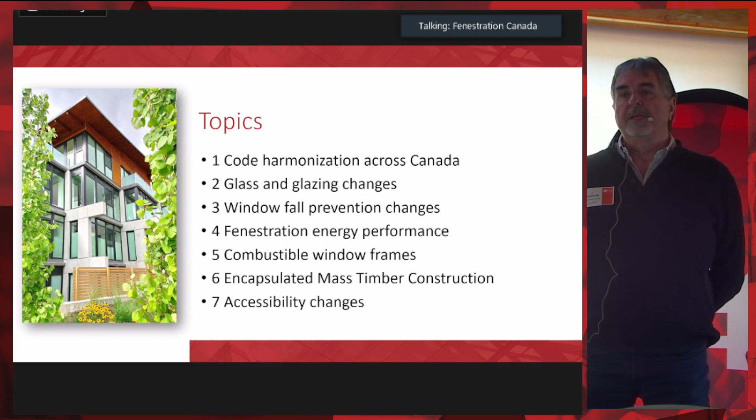Fenestration energy performance is also there. They're coming with what we call tiered performance, and we'll see what it means. Combustible window frame, there was a big job done, I would say, by the Quebec manufacturers, and a big change there. Encapsulated mass timber construction is now in the building code; we can build multi-story, not more than 12, but all wood. And there are accessibility changes, some modification in the code too.

So it's going to be an overview, but I think we caught a lot of those changes that we see. So, code harmonization, go ahead, Mr. Flipper.

Because the free trade agreement made in 2017, they want to make harmonization a national priority. Codes from everywhere in Canada, territory and provinces, so there's not a lot of difference between all those codes. There will be, because there's specific places, specific climate, specific danger or whatever, but as little as possible.

The 2020 code is now adopted, and the federal would like harmonization to be started within 24 months. I'm not sure you'll see that afterward. They want to ensure provinces and territories have meaningful input, like I said, if there are differences, they want them to have a voice in the National Building Code.

And now it's freely available on the web. I don't know if you've seen that, I tried it last week, I downloaded a couple of codes. It's available free, and they think they're going to make a benefit of it -- it's a government projection, so a lot of money, from 750 million to a billion.

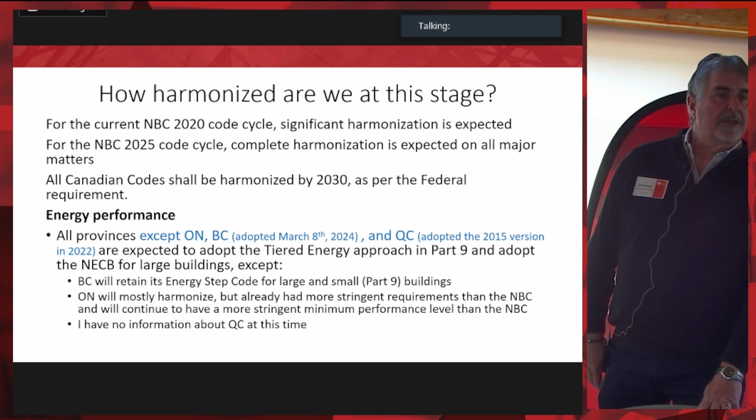expected to adopt a tiered energy approach. We'll see that later on for energy, how they want to work that out. I'm sure they're going to go that way too. At this point, BC already has the step energy code, so it's already like that. I have no information about Quebec, I tried to have it before coming here, but it wasn't ready, wasn't able to get it.

Can you flip it? Thank you. Okay, glass change, there are changes. You can go again, please. Okay, so there are changes for glass in section 3 and section 9 of the code, so that's what we're going to see.

What they want is, now they've adopted CGSB 12.1 2017. It was not in the code before, and the main reason for that is to try to avoid cutting injury for people when they have to go out or open the door, open the window, whatever.

The previous one was 1990, and it harmonized well, again, in the harmonization concept with the ANSI Z97 2015. And it includes now organic coated glass and plexiglass or plastic.

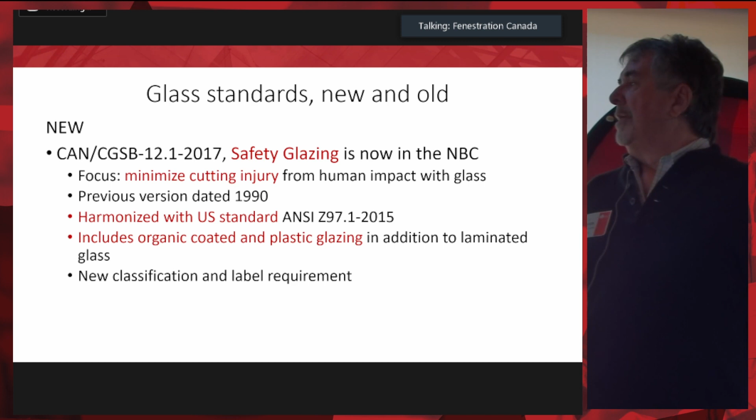New classification and label are required. Okay, so now it's in the code. You can see in the table at the beginning of the code that they refer to the CGSB 12.1 2017.

But the spandrel glass, I don't know if you use a lot of these here, spandrel for between floors, not that much, but it stayed on the old version. So it's still the CGSB 12.9, 91, so still there.

So 131, I won't read all those numbers. Document reference in the NBC 2020. Transparent door and panel also, section 3. Safety glazing and assembly occupancy.

This is new. We are in an assembly occupancy right now. So that would be, you'll see a lot of places that were not covered before. Tubs and showers, and type of glass and protection of glass in sentence 9614.

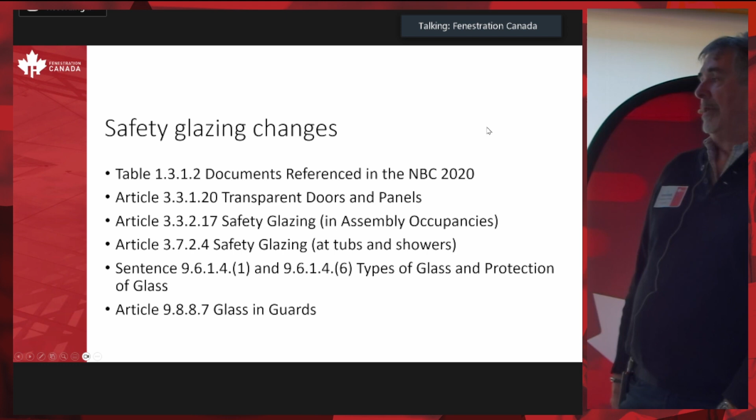And glass in guards also have some changes. So again, safety glazing now, not how did we say safety glass before? Now it's called safety glazing.

Safety, now recognized the NBC, that's what we said. Safety glazing instead of safety glass. So we can see it there.

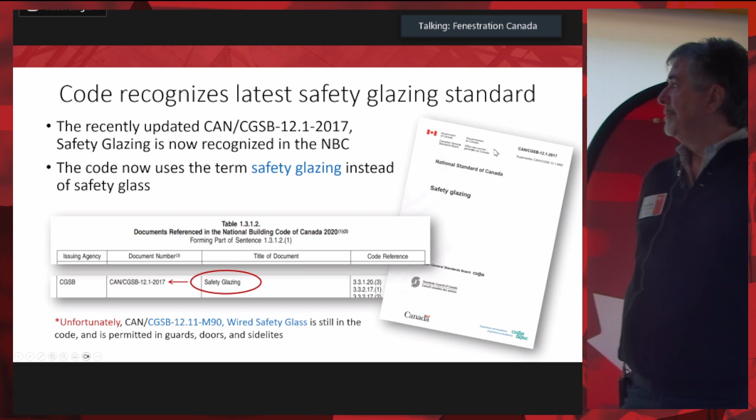Go ahead, sir. Thank you. Why was the word 'unfortunately' in red for the wire glass?

Because it's still, we're going to see that a lot. Wired glass is still in the code as a good safety glass. And we all know the problem we have with that.

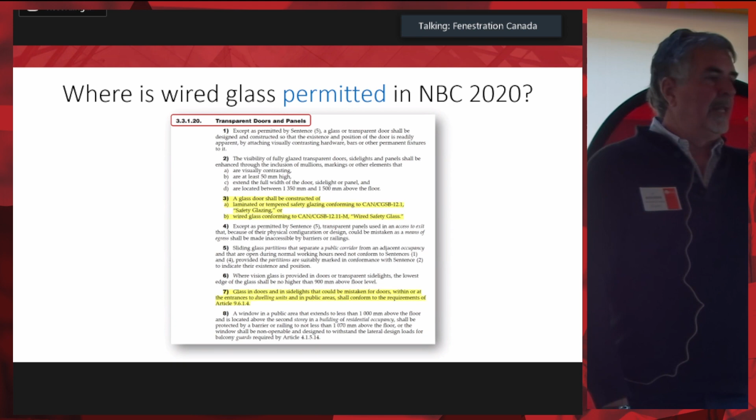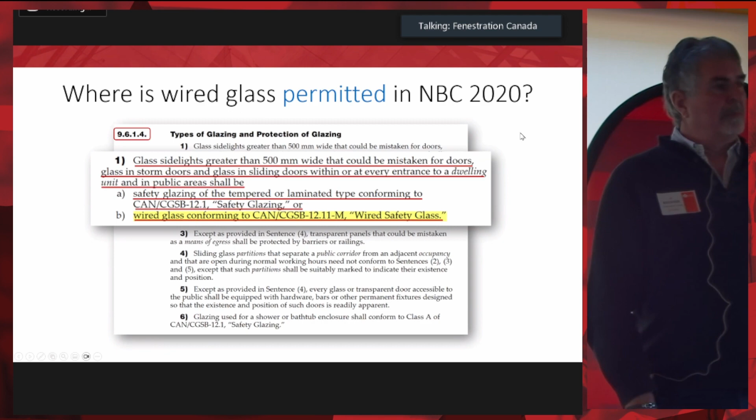Yeah, but yeah. But you'll see it's possible in certain applications to still use it. Yeah, so in the different companies, they think it should get out of there, except for fire. It is dangerous. Yeah.

Yeah, and you cut yourself a lot. Other people were cut. That's why it has to be removed. But...

Okay, so where's wire glass still permitted? Glass in guards shall be safety glazing or wired glass in section B. So still permitted.

The only place it's not permitted in the code is baths and showers and assembly occupancies like here. We wouldn't be able to put some wired glass in the door, for example.

Assembly, like I said, it's where people meet, like political, travel, religious, social, and even restaurant. How many restaurants you go downtown Moncton, downtown Montreal, they don't have safety glazing? Okay, that will have to be done starting from 2020.

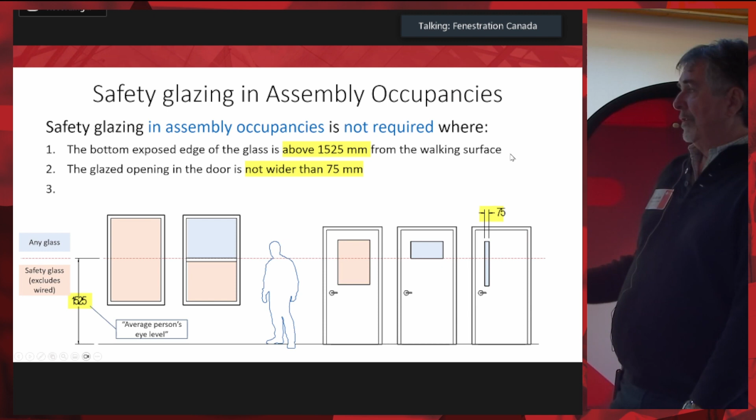So for that, safety glass at 1525, and we presume it's about the average person eye level. It's 60 inches, so 5 feet. That's, it depends, we say eye level, yeah.

So over that 1525, all glass is permitted, any glass you can put there. So we can see the drawing. And also, if you are...

915 millimeters or greater to have access to window, then, for example, sometimes you've got like a mezzanine and you've got the windows there and you don't have access to the window. So if you did, you'd fall down. So if you don't have access, then it doesn't need to have the safety glazing.

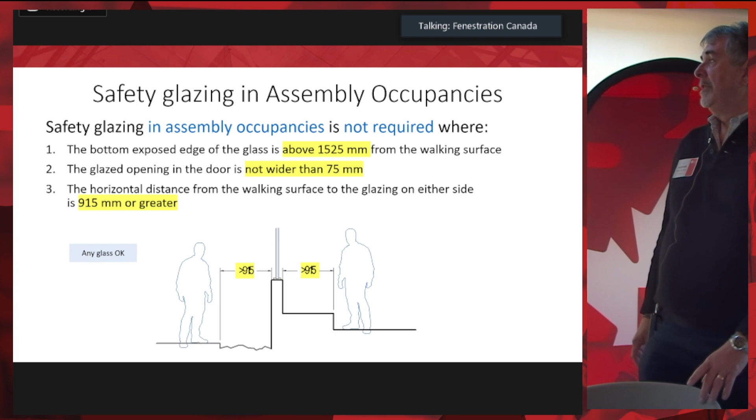Everywhere people meet. Well, I would say, yeah, yeah, yeah. Everywhere where they say people can meet, a lot of people together. That's an important change.

Okay, thank you for flipping. A bit fast, but that's okay.

Okay, window fall prevention changes. That's also in part 3 and part 9. It has some changes. Go ahead.

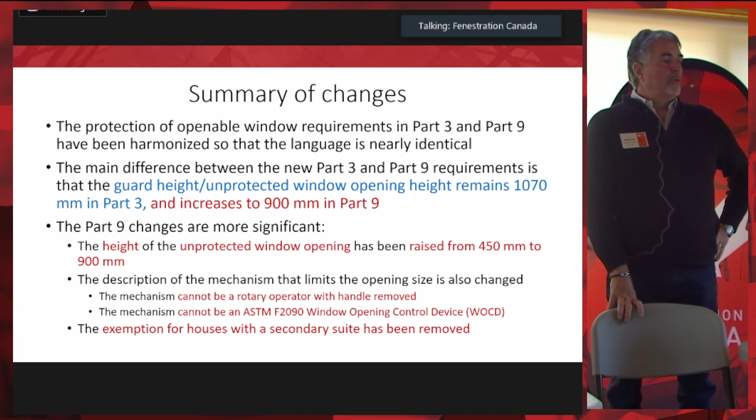Main difference between part 3 and part 9: in part 3, the opening height, you need to have a mechanism to stop the opening on the window over 1070 millimeters. And in residential, it's 900 millimeters, so almost 1 meter. So that's a big difference.

Okay, so it has been raised in part 9, and in part 3 stays at 1070, but it was increased from 450 to 900 in residential.

The question we have now, people talking about it in committees, is it high enough for kids? Because if we're talking 900 millimeters, it's not that much. So a kid with a chair can fall down, you know, push on it. So...

I don't know about Alberta. Can you talk about Terry or...

So Alberta has recently released what they call a STANDATA, which is an amendment to their code that allows for the use of F2090 WOCD devices for fall protection and egress.

So currently, Alberta allows these devices as well as Quebec. Quebec, being under the 2015 code, made this change back when that adoption happened. So currently, Alberta and Quebec allow these devices.

It will also be of great interest to know that there is some activity in New Brunswick looking at fall protection and these devices. We are reaching out to them, giving them information about the devices and the position that Fenestration Canada took along with WDMA and FGIA, and are supporting their possible adoption or amendment to allow these devices. As soon as we get clarity on that happening, we'll let everybody know.

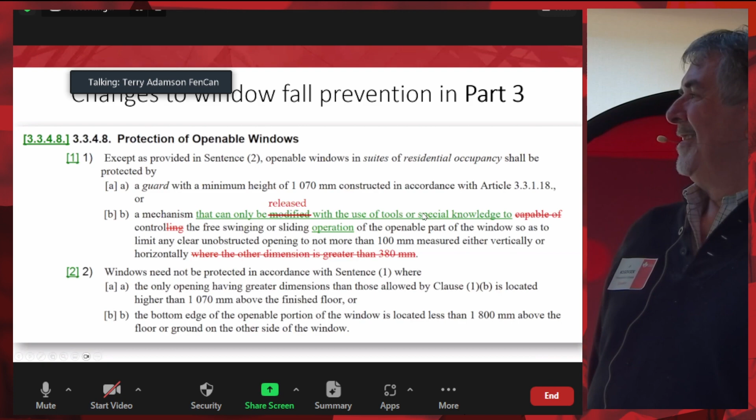The mechanism was authorized in the code. It's a mechanism that can only be released with the use of tools or special knowledge. Like I saw in the room where we were, at the Four Points, they have a stopper for the guillotine, for a double hung. I looked at it, and we would have to take something to pull out the track cover, if you want. So that would be okay. I looked at it, okay, I can pull it, but because I know what to do. But people who don't know what to do won't be able to do it. So that would be okay.

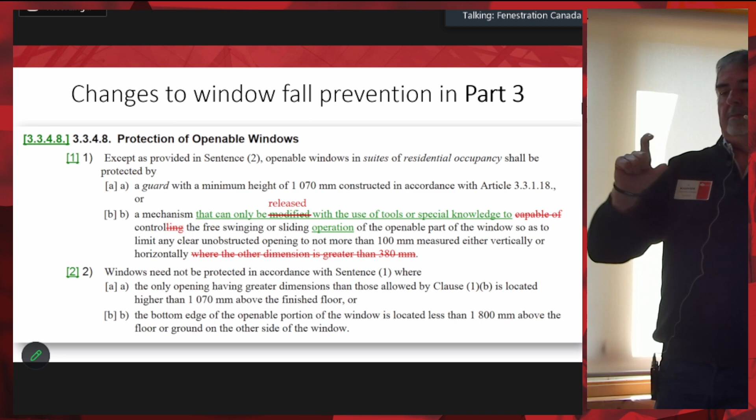And the clearance is 100 millimeters. It was 380 before, so not big. Or, they don't need to be protected if it's over 1,070 millimeters, or if outside, you only have 1,800 millimeters before the ground. That doesn't need any protection.

And we're looking at the 2020 code, which really hasn't been adopted anywhere around Canada yet. But that's what's coming.

So do you think, Terry or Steve, that the work being done in New Brunswick, are they hoping that would be done in time for when the code gets released? And the other question would be, is there similar work happening in Nova Scotia at this time?

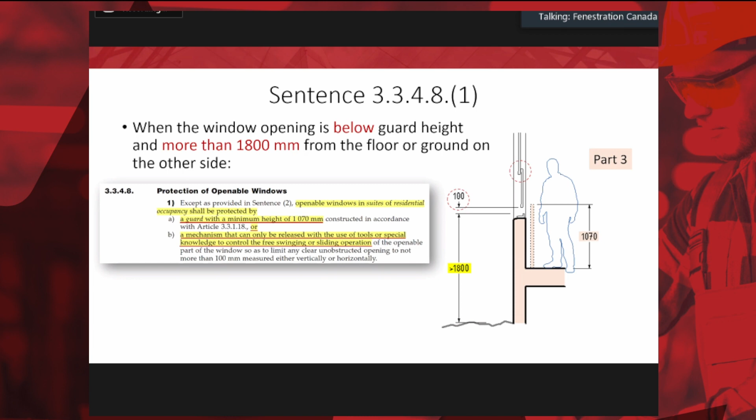Nova Scotia is different, they're actually still looking for a new building code administrator or chief building official. There's a gentleman there who's on it, so they're probably looking for that. I would think that New Brunswick would have that decision before the adoption of the code.

Is it likely that New Brunswick is going to follow what Alberta did? I can't speculate on what they would be doing, but in most cases I think it's common sense.

Okay. This one for May 1st? This 2020 code.

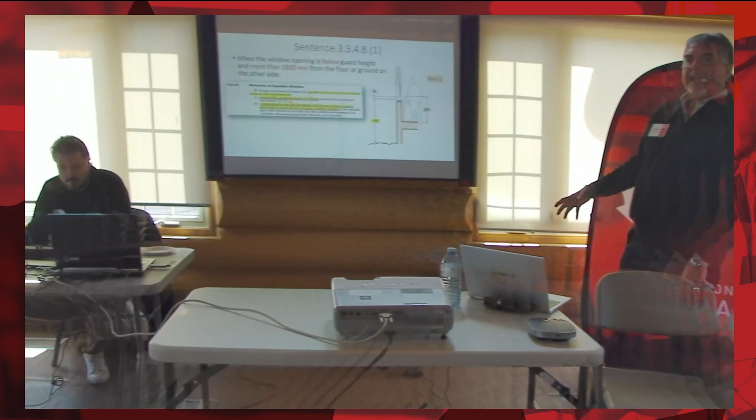My question is, you said that the 2090 is not accepted in the code, but it doesn't state that in the code. It says it has to be released by a tool, that could be inadvertently opened by a child, that's what it says in the appendix. So how do you define what a spring loaded button is, and how do you define what can be inadvertently operated by a child?

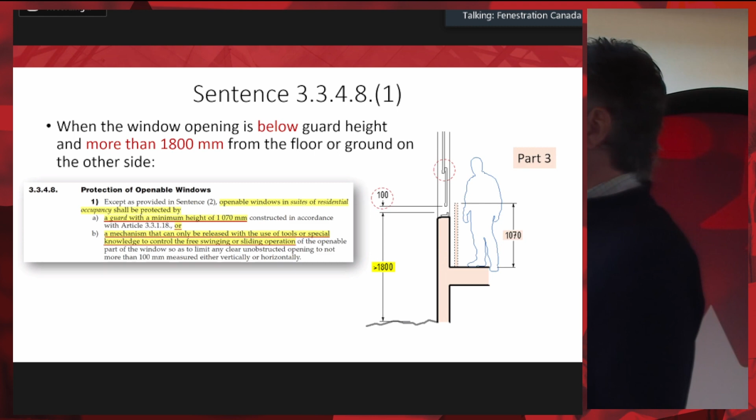So again, in section 3, here's a drawing explaining everything. If you're more than 1,070, you need to limit it to 100 millimeters, even if it's 1,800 outside.

Can you flip it? Say, use of a tool, yeah - again, same thing here, part 3, 1,070, 1,800. Here that would be okay. Release can be used with a tool or special knowledge - sorry, not a special tool, a tool or special knowledge.

Is a pen a tool? I don't know, but I don't think so. But when I see a tool, I see a screwdriver.

Do we have this one, Terry? Is it the next one? The Note 9881? Again, that's in part 9 - it's about the same except the height, 900 millimeters. Okay, there's the new sentence. Okay, go back to that - the last one. Oh, go back, Mr.

The mechanism that can only be released by use of a tool or special knowledge, right - the control. And I would say that the 2090 is a special knowledge. But again, you know what to pull on, you know what to do. But again, for egress...

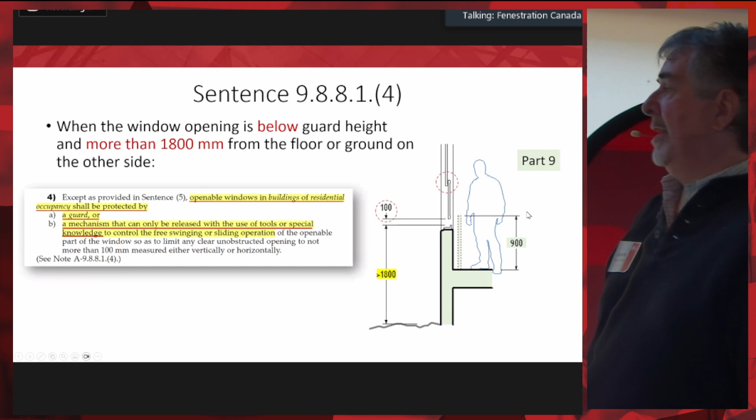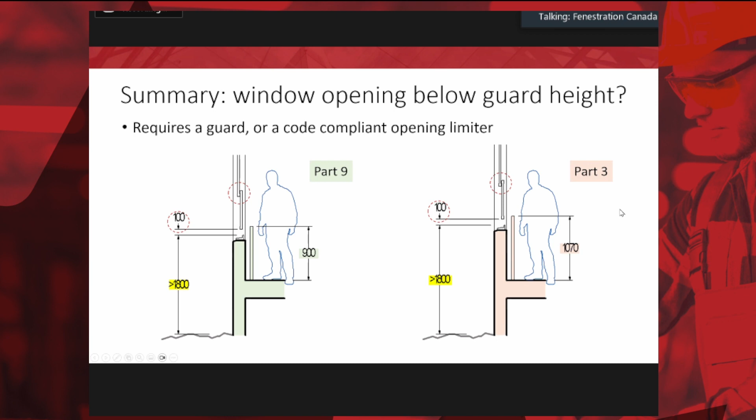So that would be perfect - no need for a stopper.

The mechanism needs a special tool, and it's not clear because they don't say. 2090 is not accepted, but they say we need a tool. So, like I said, it's confusing, and a draft letter explaining all that was sent to the code people early this year.

I don't think so, not yet. So, again, the question is should we bring it up to 1220 for the kids in the house? Because again, 900 is not that high.

Yeah, but 1200 with a chair would be tough to get there. But again, imagine all the new home design with windows going to the floor, and yeah, they open. What's going to happen there? So yeah, it is something we have to work on.

Yeah. So that's a question on the table by the company. And we go again, Terry, can you flip? That's it. Yeah.

Yeah, so if I have a fixed one that I'm not really, no, it doesn't open, that's right. So if it's currently 18 inches or below. But you cannot have a fixed window in a bedroom. I understand, so it's 18 inches, below 18 inches.

So it's at 14 inches, Steve. Fixed window, does the code not say I need tempered glass in that? Below 18 inches? Right, that's a variant. So now, is it below 36 inches? Is this code adopted? So where in the code is actually the national building code?

Is it actually, what's that? It doesn't say. Well, it says plus, plus, plus, plus, so I myself use the rule of thumb of 18 plus 2. And when I use that rule, I don't actually use it as it's stated in the national building code, I go to the international building code, and I use it because it defines that glass has to be 9 square feet, plus. Right, yeah.

There's 5 conditions that it has to meet. The rule of thumb is 18 inches and below is tempered glass. So now is the rule of thumb 36 inches and below tempered glass? If it is 5, I think we're going to look at it after. Well, we saw that on the safety glass - it said 500 millimeters or wider needs safety glass.

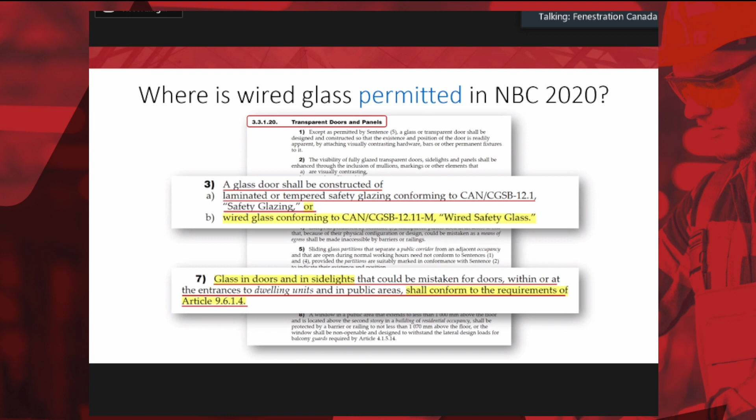It was the one that we referenced that it was changing from 450 as the minimum, for the height above 450. Okay, that was the fall prevention. No, that wasn't fall prevention. It was talking about, when we were talking about safety glazing. This is wire glass.

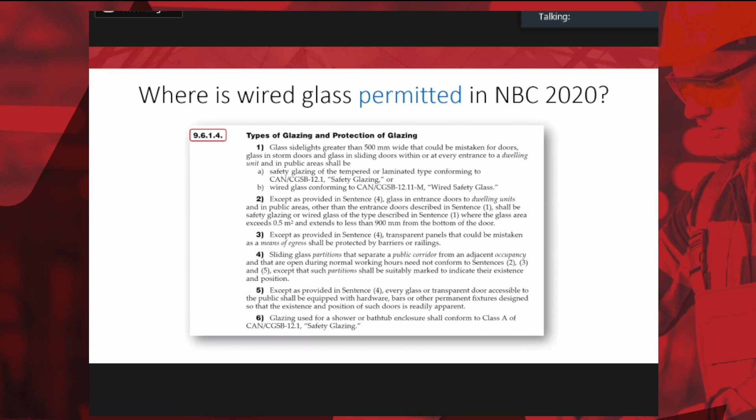Can you go back? Just start from the beginning, Terry. Okay, go ahead. Easy, laminated glass, wire glass. Here it is. Here it is. Is that the one you're talking about? Number 2? No? Can you flip again, Terry? Another one? Another one? Yeah.

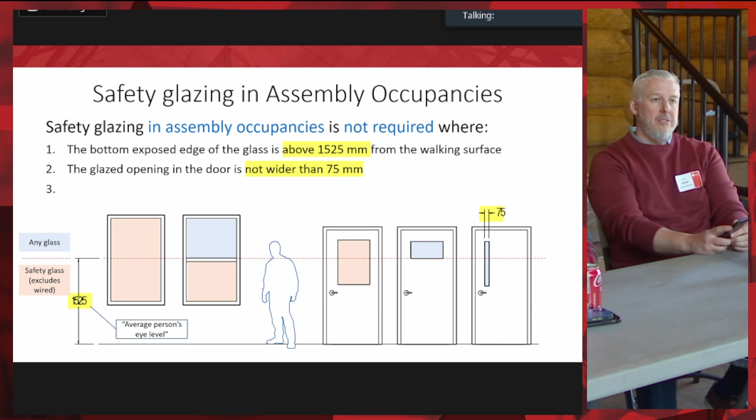That's an assembly occupancy, that's about 60 inches. There's still another one, 5 foot. Yeah, this is less, right. For example, here, our unit would have been - can you flip it? Yeah, that's, we just...

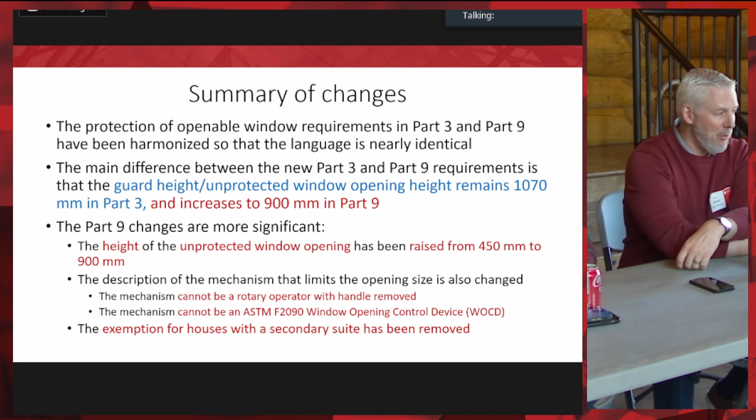See, it's maybe it's the fall prevention. Go ahead. Didn't do residential, but I think it's the same. Oh, here. There it is. Unprotected window opening, raised from 450 to 900, for an unprotected window opening, so no guardrail. It's not protected, so.

Right now, we always look at 450 as the minimum. So that's now 900. That's in Part 9, so that's for residential, small residential. Yeah, but is that talking about safety glazing or is that talking about opening? So what it says here is Part 9, before was 450 millimeters from the floor, now they raised it to 900. The sill, yeah.

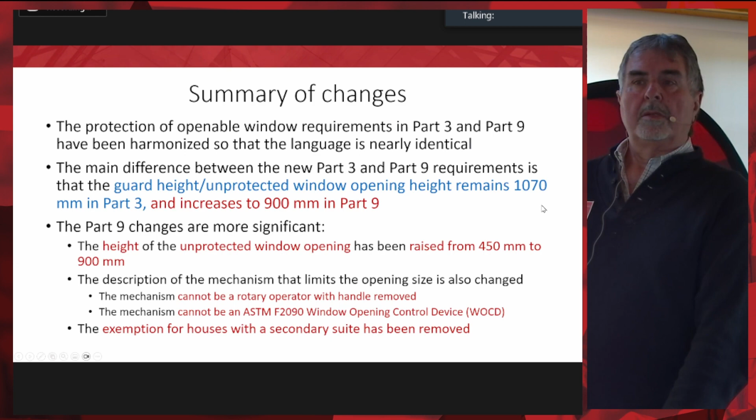That are between 18 and 36 that aren't covered. Oh no, but that's a whole different kettle of fish. Yeah, that's talking about openings. Tempered glass would be under - would be glazing protection. That hasn't changed? I don't think so. The glazing protection is different.

So again, the discussion, Terry, if you can hear, is about the fact that, like in a bedroom, you've got a fixed window, and is there a distance from the floor that you have to have safety glazing in it? So, guard - I mean, yeah, we're talking now about glass in guards rather than operable windows. Is that the question? Yeah.

Say it's a fixed window. Right, so there is language when you look at glass and guards that says if that glass is below 900 millimeters from the floor and 600 millimeters to the grade from the floor level, so it's different than what this says - that glass needs to meet guard load.

Now, we had a discussion here last week with some folks at BC Building Safety Standards, as well as some glass architects, trying to understand what this language means, because when you get into glass in guards in a dwelling unit, it talks about at stairs, ramps, and landings. But in the beginning of that section, it talks about stairs, ramps, landings, raised walkways, mezzanines, galleries, etc. So we're trying to understand where that requirement applies in a dwelling unit - is it only ramps, stairs, and landings, or is it essentially everywhere? So we're trying to get some clarity on that, because it varies depending on who you talk to. Building officials will say one thing, an architect says something else. So there's some real confusion about it. So we're trying to get some clarity on it.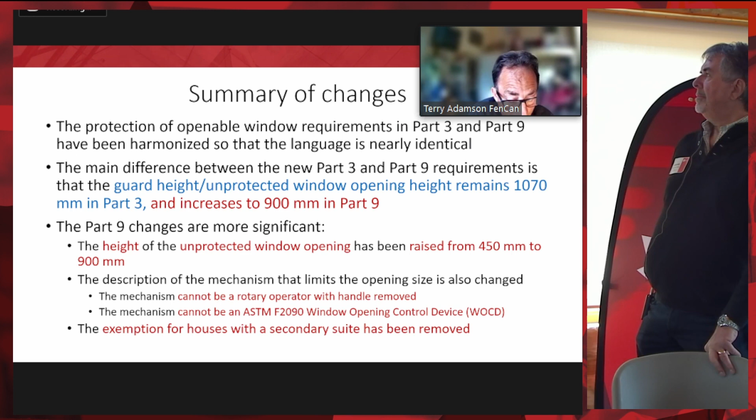Today, my understanding when we're talking about the National Building Code is that glass in guards that are below 900 millimeters and 600 millimeters to the ground from the floor level must meet the impact loads for guard glazing anywhere in a dwelling unit. That's how I interpret the language, but it's very unclear. So we're trying to get some clarity on it. I know talking to other people across the country, their interpretation and what they're being asked to comply with is anywhere in that dwelling unit below 900 millimeters, 600 millimeters to the ground from the floor level needs to be guard glazing. So we're working on trying to get some clarity on that.

But today, for the most part, that's the interpretation that I'm seeing and hearing. Are you talking to any law firms? Hopefully that helps a bit.

Are you talking about what? Yeah, is it a law firm that's going to clarify that, or?

Well, one of the groups that we're talking with is the AIBC, Architects in BC, and EGBC, the engineers, because oftentimes we get into multi-unit buildings that have this glazing either in the common areas or inside the dwelling units, and those guys are often the guys applying that code language as part of the specs of the project.

I do have an outreach to the Building Officials Association in BC to get their interpretation, as well as this group we've started talking with here in BC. So clarity and interpretation really at this point needs to come from two places, in my opinion: from the building officials and jurisdictions enforcing this, and the architects and engineers applying it in specifications for multi-unit larger buildings. So those are the two places we're trying to get clarity from.

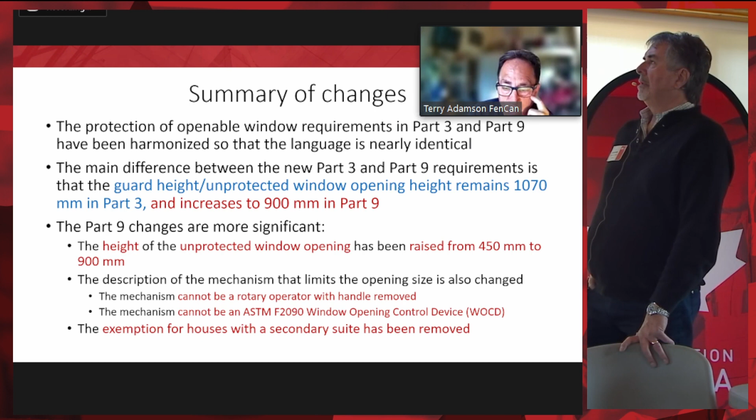Fenestration Canada, along with WDMA and FGIA, drafted a letter supporting the allowance of F2090 WOCD devices for fall protection. We sent that to all of the code developers across the country in each province.

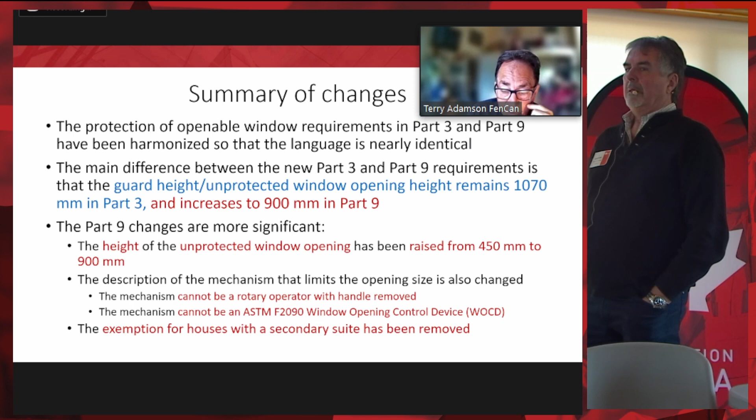I didn't get responses from everybody, I did get a few. British Columbia Building Safety Standards said they are not planning to make an amendment to support that at this time. They are not prepared to go against what the NBC says because it is a safety issue, applying to children, which is always a challenge for somebody to go against a safety clause in the code that would be protecting children.

As I mentioned, Alberta did support us. The Safety Codes Council in Alberta took this on and supported our position and worked with the Ministry of Municipal Affairs, the building code developers in Alberta. They have created a standata amendment to their code to allow these.

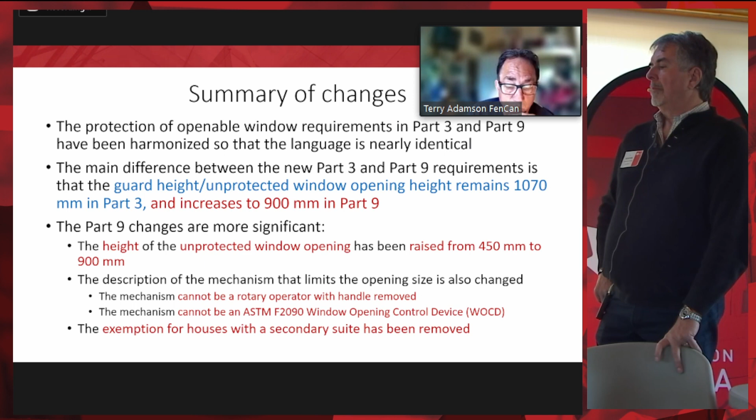There is some positive conversation going on in New Brunswick that is looking at this. We've reached out to them again, provided documentation and information on WOCDs, and resupplied our letter supporting these devices. They're looking at it again, and I can't speak to what they're going to do, but it certainly sounds positive. If we can get their support for these devices, I think it would be an easy case to approach all the other Atlantic provinces to get on board with that.

So we didn't get responses from everybody, we continue to follow up with them. We have submitted a code change request to the National Building Code Development Committees. Unfortunately, it would be for NBC 2025, but currently there are over 2,000 code change requests in the queue. We're pushing it, but there's no guarantee it's going to get addressed. Reality is it probably won't get addressed for 2025 because there's so much ahead of it, for lack of a better way of putting it. But we continue to push for this change wherever we can. So that's what's going on.

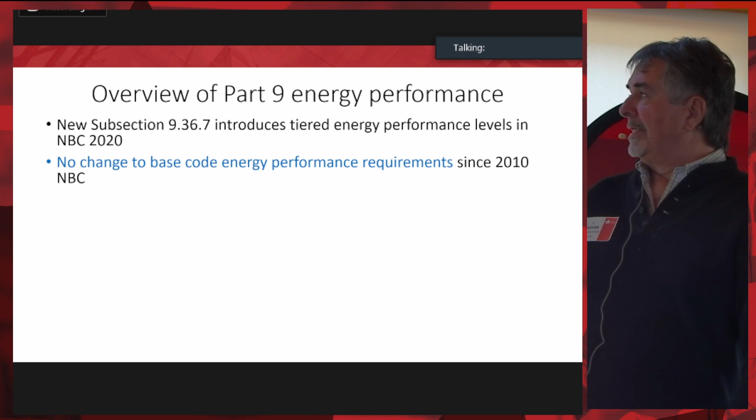Okay, so there's a new subsection, 9.36.7, about the energy code in Canada. Since 2010 they're coming with a tier approach, so we will have 5 tiers. Actually tier 1 is what we get now since 2010, so there's no change. Four tiers level higher than that.

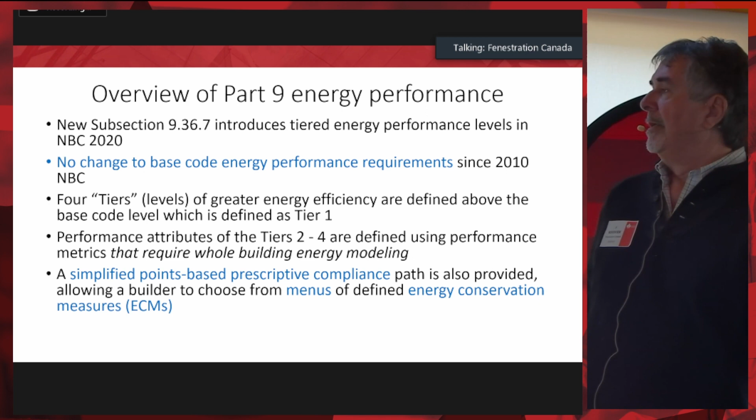Tiers 2 to 4 are defined using performance metrics that require whole building energy modeling. So for new construction, a builder would have to have an energy model of the future house, and that includes the HVAC, the windows, insulation, the roofing, and all this. So it has to be modeling, but we'll see that they also have a point system, so that instead of modeling, which costs a lot of money, you can get to where they want to get. So the point base, go ahead.

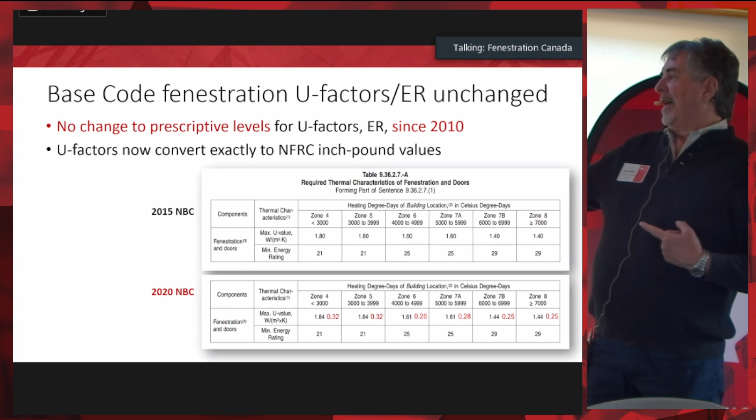Prescriptive tier. One of the big changes now is they changed the requirement to match the American or inch-pound U-value. So you've got the U-value of 1.84 instead of 1.80 to match the 0.32 in inch-pound. So that's a change.

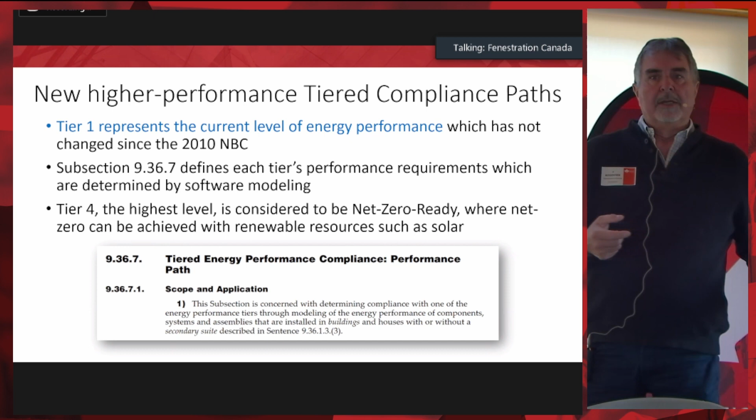The current level of energy performance that has not changed since 2010 is tier 1. That would be what we call the base code, the energy efficiency that we would compare a new construction to. Okay, so there's 2, 3, 4. Did they adopt tier 2 or not yet, Terry?

Tier 2 is 10 points on the points level. But does the builder have to build as per tier 2, or can they still build tier 1? No, they can build to tier 1 base code. Some jurisdictions may be requiring tier 2, but it'll vary by jurisdiction depending on who's adopting what level.

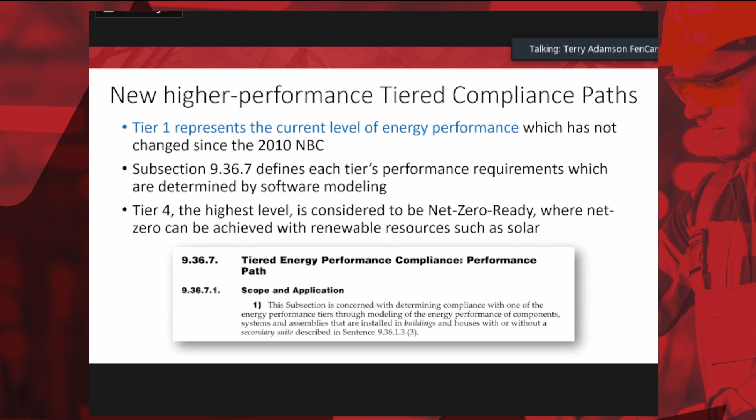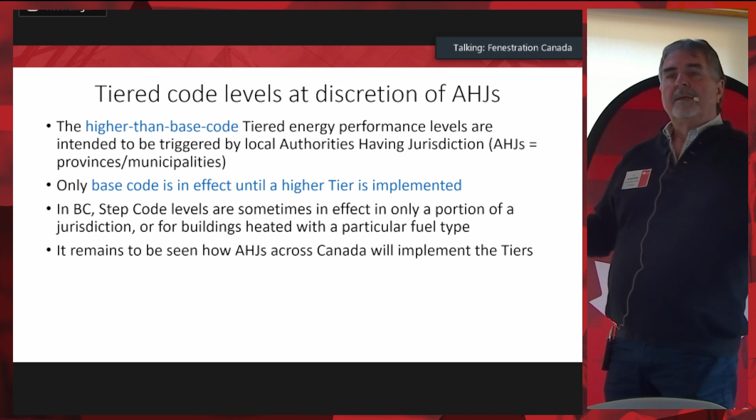Al did a great job comparing if a builder has to insulate the house more, or put in a more performant HVAC system, or whatever, compared to windows. You'll see that windows are now a good solution for the builder, and a lot less expensive than doing anything else in the house to get to tier 2. We'll see that. So BC already uses the step code levels, and they realize too that windows are a less expensive change that make a lot of difference. And it depends again, like Terry says, on the building inspector in each jurisdiction, who will maybe apply tier 1 or tier 2.

I just want to jump in on the step code thing because it may be of interest, as this kind of approach might get adopted across the country. In BC currently, all jurisdictions need to be on step 3 as a minimum. But what we're seeing is some jurisdictions are saying, if you're using electric fueled heat and hot water, you can use step 3. But if you use natural gas heat, natural gas hot water, or cooking appliances, you may be required to build to step 4, which would mean higher performance windows, more insulation, thicker walls, etc.

So it's a really interesting scenario we're seeing here in some jurisdictions, where depending on the heating source you're using, you may be required to go to a higher step in BC, or a tier in other regions of the country. I expect we're going to see that kind of approach in other jurisdictions as they push to get buildings off fossil fuels. Just an interesting scenario happening here in BC that may spread across the country.

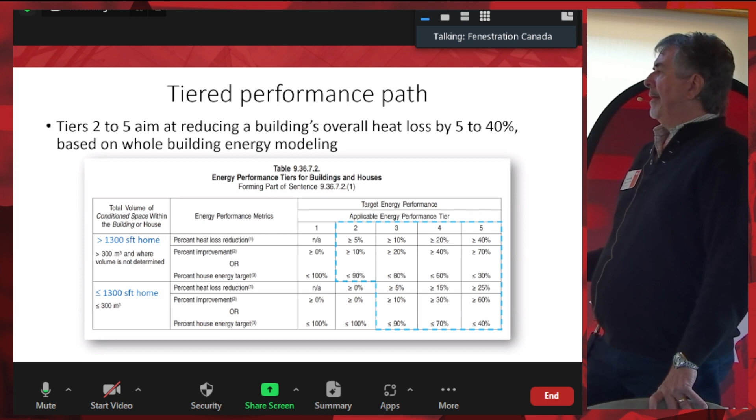So just to compare the different tiers, how much economy you have to do from 1 to 5. For a house over 1,300 square feet or 300 cubic meters, tier 2 requires 5% more energy efficiency, then 10%, 20%, 40%. If you're talking about a smaller house, then it's less stringent. It starts at tier 3 to go to 5% energy efficiency.

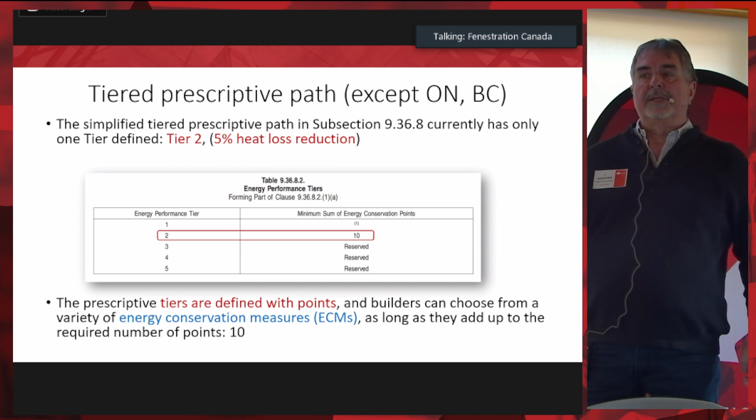It's based on 10 points. So starting from the base code, if you get 10 points more efficient through material, insulation, windows, then you're at tier 2. I'm talking here for the builder who wants to go to tier 2. If the jurisdiction says we want tier 2 now, he has to increase the energy savings based on points, so he doesn't have to go back to modeling -- that costs a lot of money. We'll see what happens when we do that.

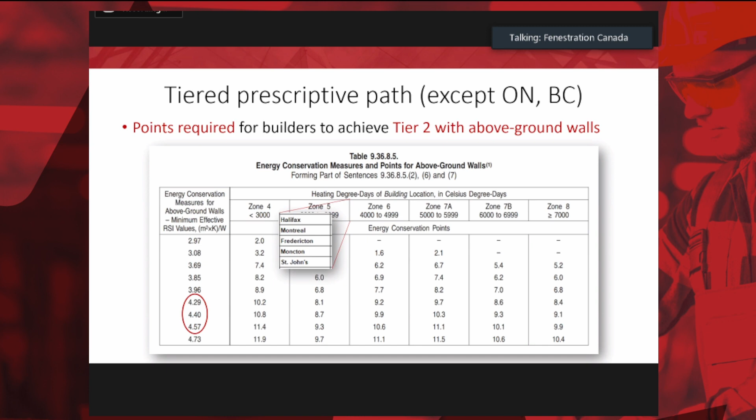Let's say Halifax, Montreal, Fredericton, Moncton, St. John's -- we're in zone 5. So to get to those levels, the example here is: if your wall insulation is 2.97, you don't need to change anything. But if you want to increase to tier 2, you've got to increase your insulation.

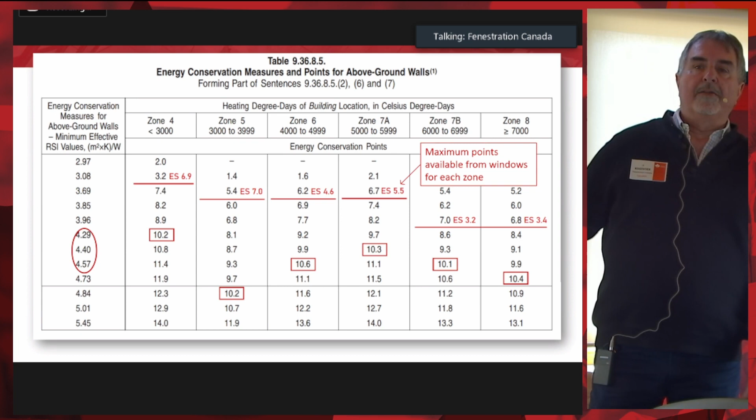You just almost get there. Okay, so it's a point because at one time I remember people were saying, our people, Fenestration Canada people, manufacturers say builders will never buy a triple window. That's not true anymore. The way they do energy performance in the code now will help us, because we're used to Energy Star.

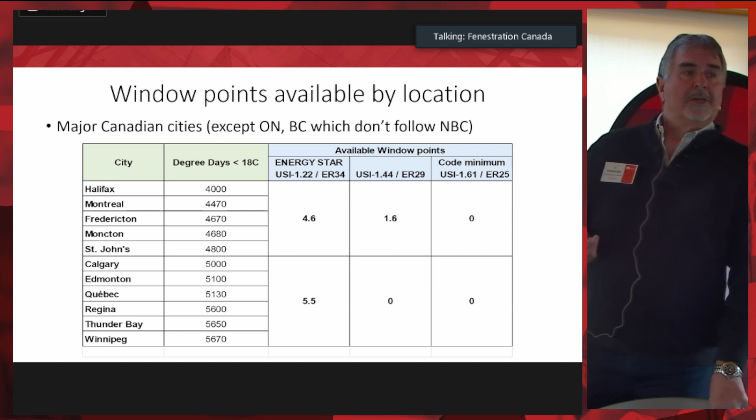We're already there, 0.21. So we got 4.6 points out of 10 if you're using a window performing as Energy Star, 5.5 in zone 7. Can you flip?

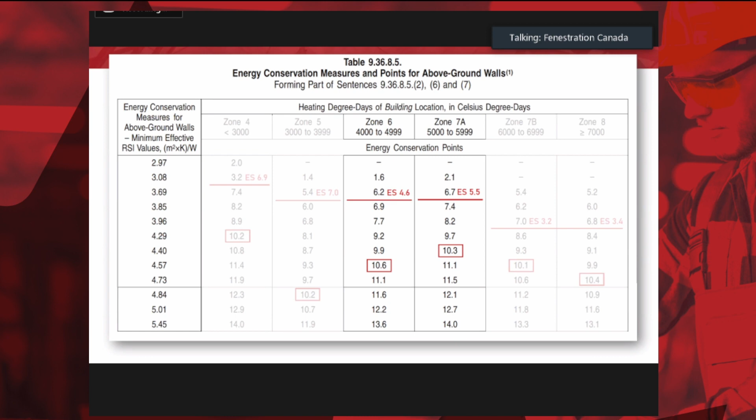Hello, Terry. Okay, so see, at 3.69, what's 3.69? It's about R20. Can someone do 3.69 by 5.678? Because we're used to talking inch pound, I am an older guy. R20.9, yeah, 20.9. So that's not a lot.

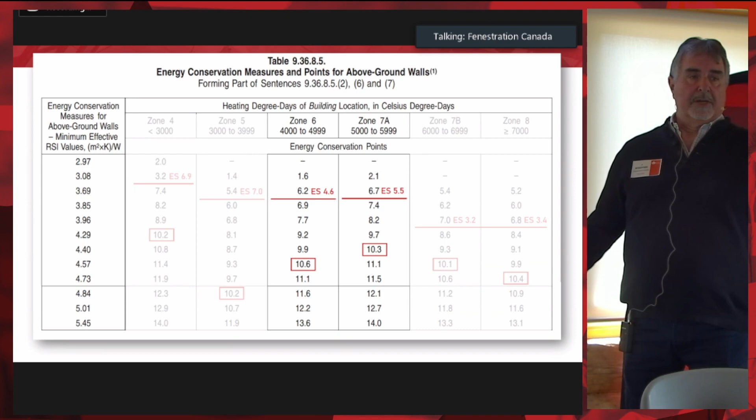That's a 6-inch wall. So a wall, 6-inch wall with the foam and the airspace and maybe a good sheathing outside or whatever. You just add the windows, triple or Energy Star, and you're tier 2. So the contractor doesn't have to do modeling again, doesn't have to change a lot of systems in the house, just the windows, and he's in.

So if I had salesmen, I will teach them that, selling to builders. Can you go ahead?

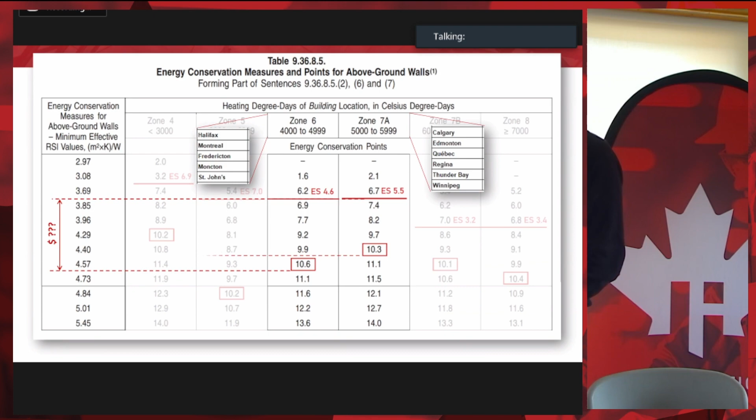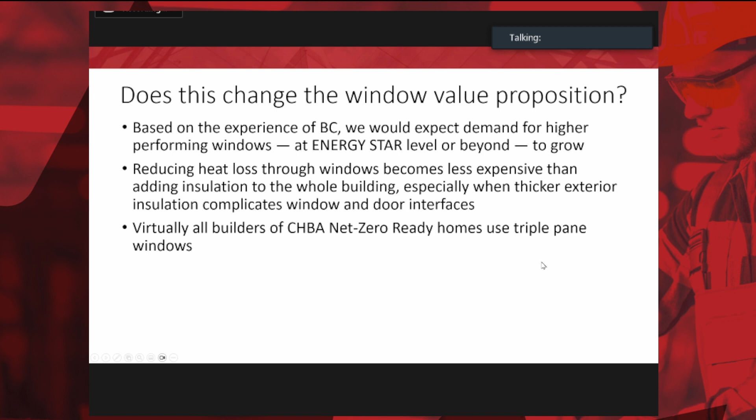See zone 6, zone 7 again. See the difference in cost is right there. Can you flip again? So yeah, it's not a lot if you go with Energy Star windows, for higher performing windows. Because of that, that's what BC sees now. It's less expensive than adding any other thing. They will use triple now, and before nobody would use triple.

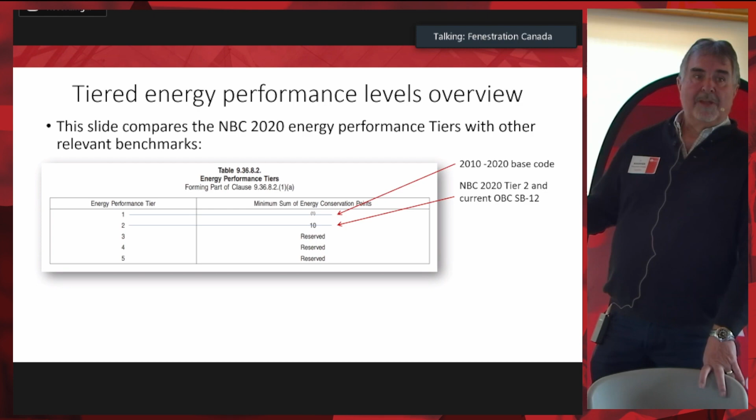It depends how much point it gives you. Well, maybe you won't get there, because I was talking walls, because they say wall above the ground. So going from R20 on the wall to R30, that's in there also. It's a lot of money. And everything costs more because the window has to be 0.25 and maybe more than that.

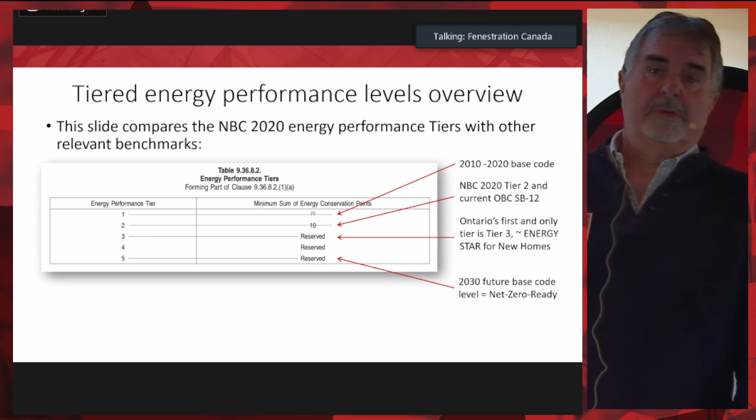So, yeah, the 10 points to get tier 2, NBC 2020 tier 2, current in Ontario. Ontario now is pushing to tier 3. This is the future base code. Tier 5 would be net zero house. Okay, so that's where everybody's aiming to.

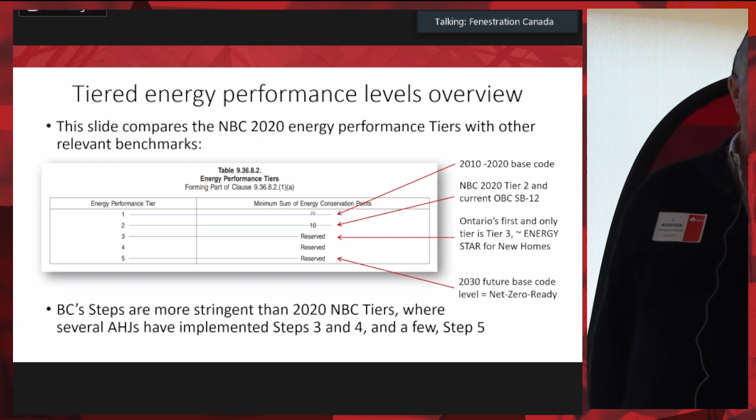But again, windows will have a big impact. I don't remember exactly when he did that, but Gilbert Riopel at UL did a study, a simulation, changing insulation in the wall instead of changing windows. The impact is a lot less. You double your wall, you don't have the impact that you do changing your window. So that's something we have to remember and work with.

So it's going to increase percentage, 25%, 50%, 60%. But again, with the point system, you avoid the energy modeling for the whole house.

Any question on that? I know it's coming. I know the guys at Building Knowledge, Andy Oding and those guys, they did a paper this year talking about, you know, it's a no-brainer to sell triple glazing as opposed to adding insulation. And I don't know, it scared me in a way. It's almost like, okay, so all of a sudden we're gonna be like those guys up in Ontario a few years ago. We'll be in our plant on Saturday morning making triple glazing again.

So, as soon as this gets adopted, I think we're still almost 5 years out. I remember when Al presented that, there was a question: when do you think the other tiers will be adopted? Because all the codes, like I said, Quebec just adopted 2015. He's going to do 2020 when? 27, 28? So by the time we get there, it's maybe 30, 35. We'll see that, but we can get prepared and prepare the mindset of our builders.

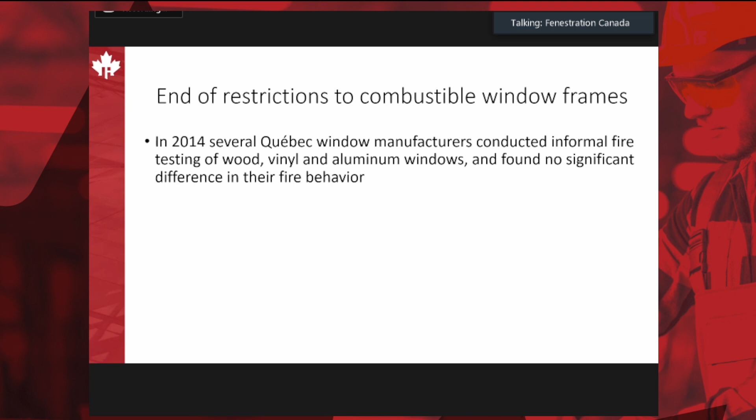Quebec, I remember I was on the committee, they said, why is PVC not— only aluminum was for combustible? And they did a test, and it appears that with the aluminum, the thing is that the glass is falling down. But with the PVC, it wasn't falling down anyway. So it convinced the people that combustible windows are now out of the code for that, except for part 9, you'll see, for floor-to-ceiling windows, wall windows we call, or curtain wall windows.

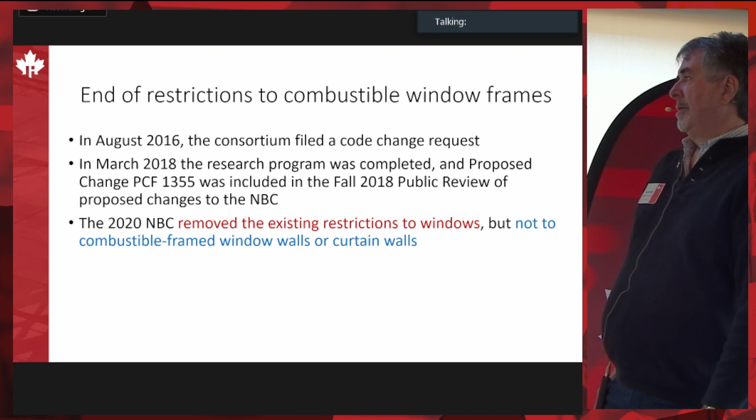Go ahead, that's the story. So it was removed in the 2020. Not combustible windows—walls, or curtain, these are still in there. Okay, but for windows, there's no more restriction.

They're permitted combustible, but there's another line that's going to add at the bottom. Should not apply combustible window, but they have to be separate.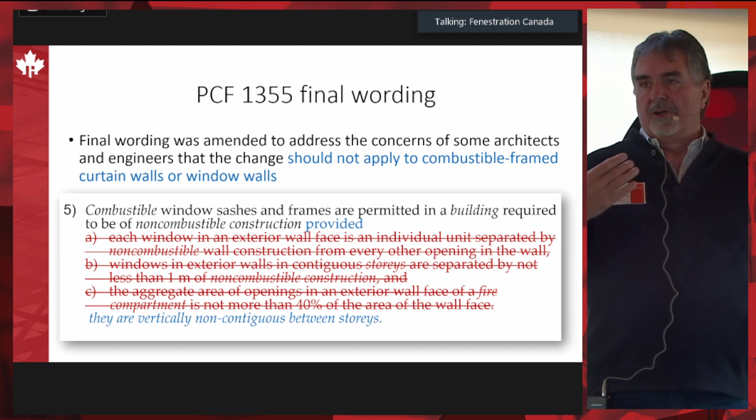They are vertically non-contiguous between stories. There was a question in the presentation about whether 1 inch is non-contiguous. The space of the floor, the height of the floor, at least should be non-combustible or not continuous. That would make the difference. So it changed a lot of things for buildings.

This one was built. See the difference between the window? They're not contiguous, and that's PVC windows. That's a big improvement, because at one time only aluminum was allowed in those buildings.

Do you have those kind of buildings here? Encapsulated mass timber construction. But that would be one in here.

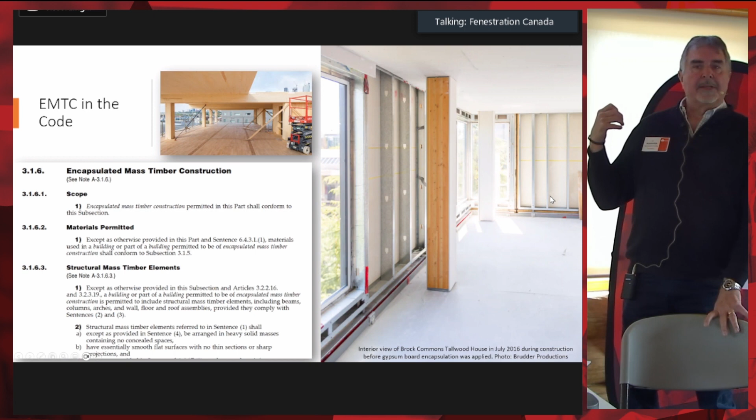It has to be encapsulated, surrounded with something like gypsum or whatever. But if you can prove, and the timber guys will, that a certain size will support what it has to support until a certain time, then you'd be okay. So the thickness of it, or the species of it, or whatever, can be exposed like here.

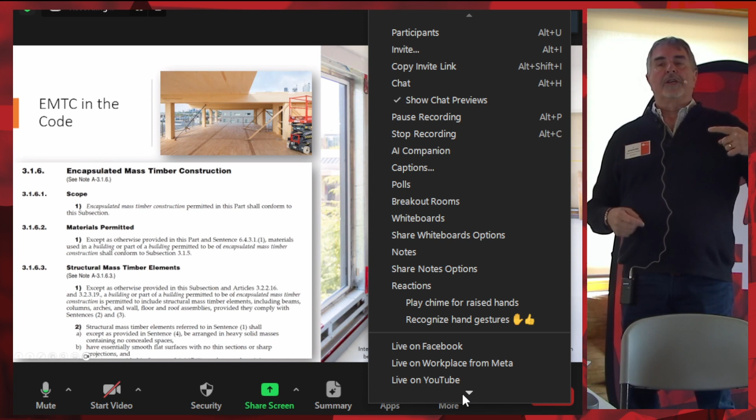That's the main thing. But in those buildings, you cannot have combustible windows still. This section went out before the combustible window change. So maybe one day it's going to be possible, but right now, if you have a building like that, those windows shouldn't be there.

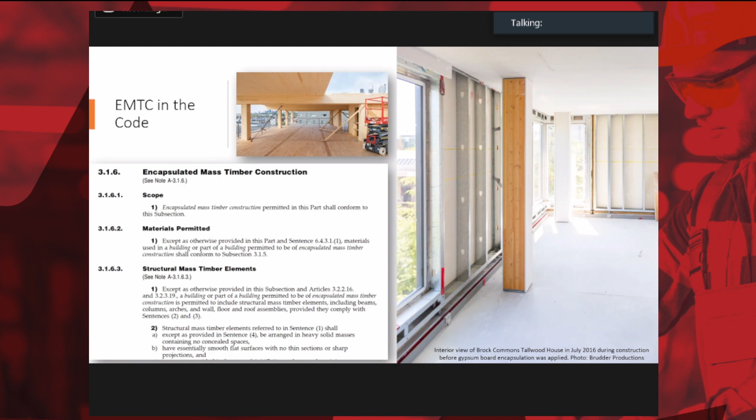Yeah, the PVC, that was before. But isn't the code restriction only applying to multi-stories? Yeah, multi-stories.

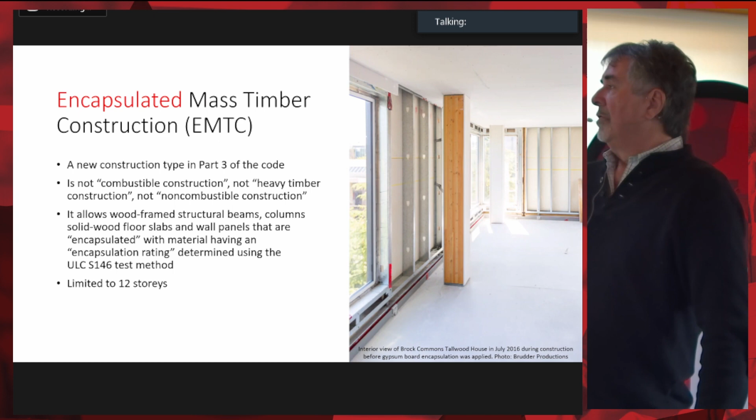That's in part 3. You cannot go over 12 stories if you build. It's more and more popular in Quebec because we had a lot of wood, and they saw that with fire, the steel would bend or melt faster than wood in certain situations. That's a building in Montreal.

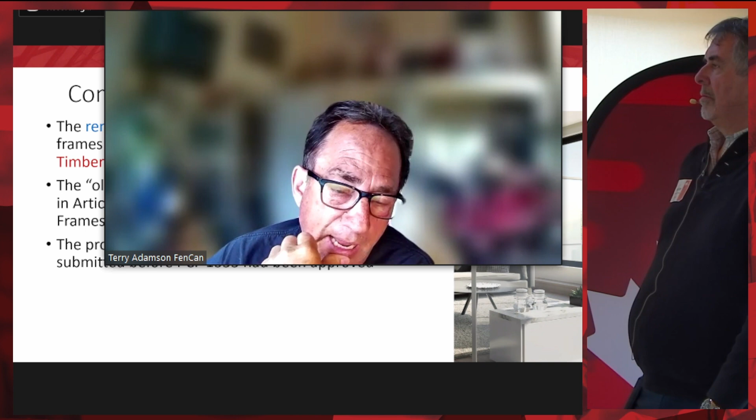The removal restriction for combustible windows, like I said, still applies - you cannot use combustible windows in those types of buildings. I reached out to some of the people who participated in that original activity to change that, and they told me that at this time they don't have anything in to make that change for encapsulated mass timber buildings for 2025 NBC. So maybe 2030. But you could probably pose a good argument and an alternative solution by referencing that combustibility change and trying to apply it to this type of building. The logic would seem to be there. But currently that change was not made in the encapsulated mass timber section of the code.

Okay, thank you, Terry. Okay, go ahead.

If it opens more than 90 degrees with the 35 3/4 slab, you'll be okay. If it opens 90 degrees, you won't. It's going to be about 840. I measured it. But if it opens more, you're going to get it.

But lots of times, like just in a hotel room, you cannot open it that far. There's always something behind it, like the washroom or whatever, and it won't open, and you won't get the 850. I got one at home that gets there, but I'd say it's a cheap one, so the weather stripping is not very efficient - it's not thick on the side, and it clears 850 just barely.

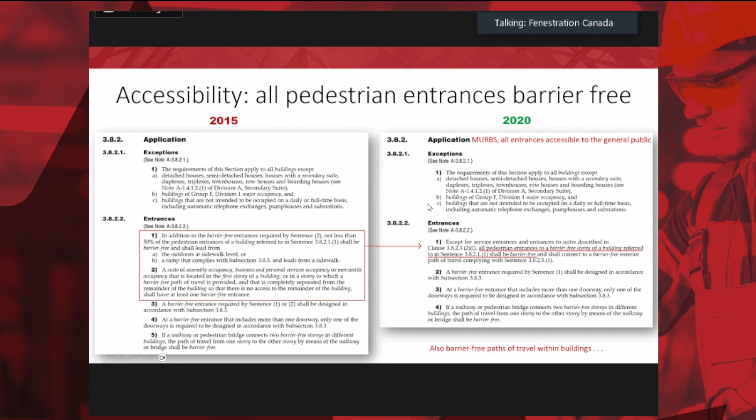Except for service entrances and entrances to suites described in the clause, all pedestrian entrances to a barrier-free storey of a building - that's new also. Look at the difference: before you needed to have a ramp, outdoor sidewalk level, or a ramp. Now you have to have free access everywhere. That's a new change in the code.

Again, it's the builder, but go ahead. That's it.

Right now it's 800. So depends on, you could say the door depends on if you have to go to the next door. Is that what it states, the next door on those? What those are is the most clear entrance when doors open.

Here has a 36-inch wide door that's going to open, unless you got 150-degree swing on your south. So if you're on the outswing, you might get away with it. Because on the inswing, there's no way - it's got to be 150 degrees. You're gonna, especially on a wider jamb, get inside the jamb, so it opens all the way. Because you got extension inside, so you won't be able to open.

That's one of my cases at home. I got extension and it won't open more than maybe 100, 110. But you can buy a 38-inch wide steel slab, so you're doing 42. Yeah, that's big.

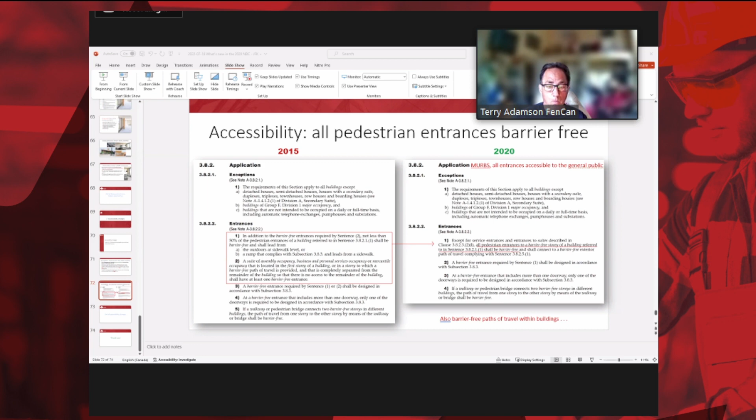So it's in - you want to hear about the door? Can you go back one for the door, please, Terry? Yeah, that's 3.3.1.13 for the door. Yeah, because the other one is a barrier-free path. Yeah.

Terry, you got to get for you, man, the application that Steve has. It's unbelievable. Yeah, I want to see that. Needs to send me that link.

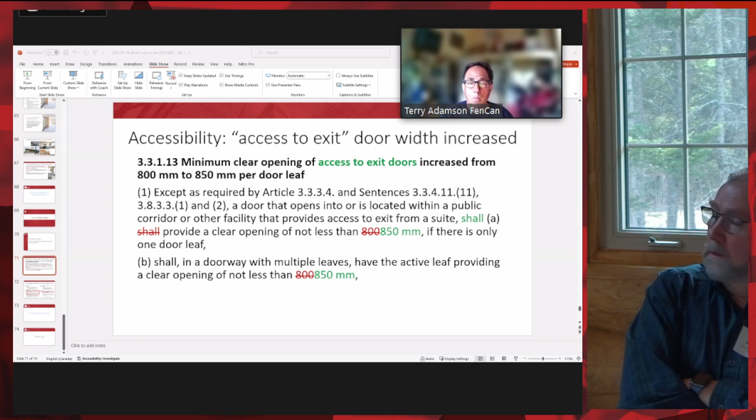Is that for wheelchair? Is that? Yeah, it's coming from the accessibility, adaptability groups that are really pushing for buildings to become more accessible, obviously, right? So there's a lot of activity in those groups that are looking for changes to things like doors and door sills, right? So there's a lot going on there. Yeah, door sills also. So no barrier meaning no sill, 13 millimeters, or... yeah.

Do we all just go back to the door guys if there's anybody that makes doors? Can we make commercial - this is all gonna be commercial stuff, cause it's public. It is commercial, but we're all doing buildings in multi-units now. It's residential, but multi-units. It's still residential. It says public access. Yeah, those would all be like, like all - this fire, should be your main entry, right? No, there's - it's public. Is that only public, the corridor?

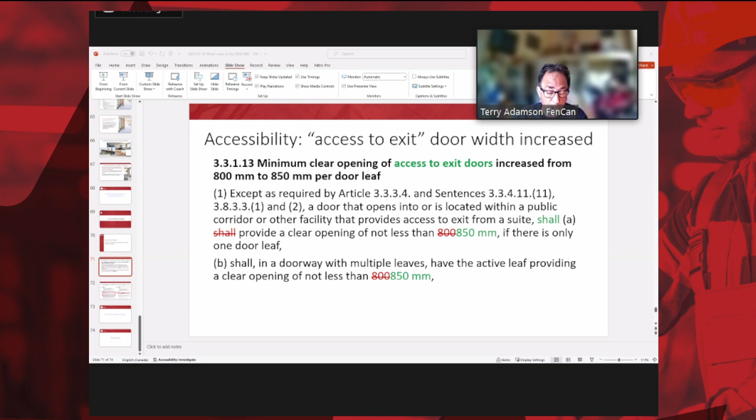So you think it's for entrance to the dwelling from the corridor, or only access to the corridor from outside? I believe it's the entrance to the unit as well, off of the corridor, if that's an accessible path. That's coming from access to exit, not accessibility.

Access to floor area, yeah. So when you're accessing the floor area, it does bump it up from 800 to 850. It tells you that access from a suite shall provide an opening, so a suite would be a dwelling unit. So access from a dwelling, from an individual unit, has been bumped up from 800 to 850.

So access from the corridor to your apartment. Looking at 3.8.2.2 entrances, it says except for service entrances and entrances to suites described in 3.8.2.3. So it may not be suites off of a hallway, off of a corridor. The door into your unit is through there, that's not an exit, you're still inside.

If you go to the next slide, section 3.8 talks about accessibility. Can you change the slide please? The 3.8... next slide, okay, 3.8.2 - yeah, that's your barrier free requirements.

So that would be going into a suite. Your sill should be easy to go, not a barrier, right? So it depends what's under 3.8 on that door. Everything under 3.8 would be applicable under barrier free path of travel to the suite, and not every suite has to be barrier free - just the ones required to be barrier free.

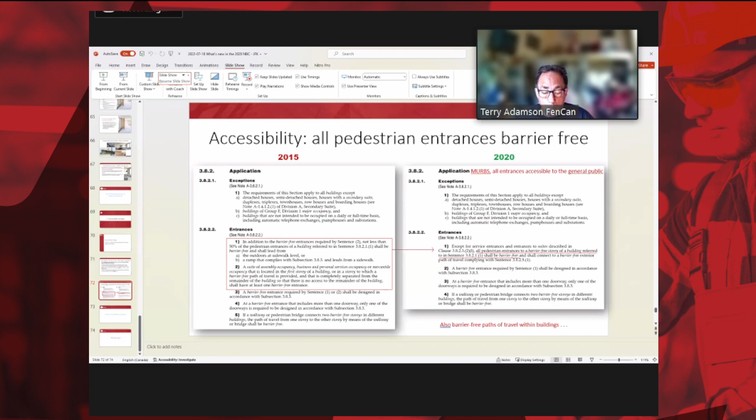So anything the public can access - but just pretend we didn't see that. So there's less impact than we thought. Yeah, less impact than we thought. I'm sure that's just the beginning, it'll apply to houses after that, right?

Tell me about the one you sent me regarding the height of the hardware on the door - is that section 3 again? So they've changed the height for door hardware, I just have to find it. I thought it was in part 9, actually. Let me look for it here, give me a sec.

Looks like the handle, the hardware on a door, before had to be over 900 millimeters. Now it has to be between 900 and 1100. The door release hardware - here, look at 9.9.6.7. Is that 9.9.6.7 you're talking about? There it is, 9.9.6.7.

Is that for a panic bar? It's latching mechanism, locking - this is door release hardware on doors in a means of egress in part 9. It shall be installed 900 millimeters to 1100 millimeters above the finished floor. So that's every door going out of the building in a residence, if that door is deemed to be a means of egress.